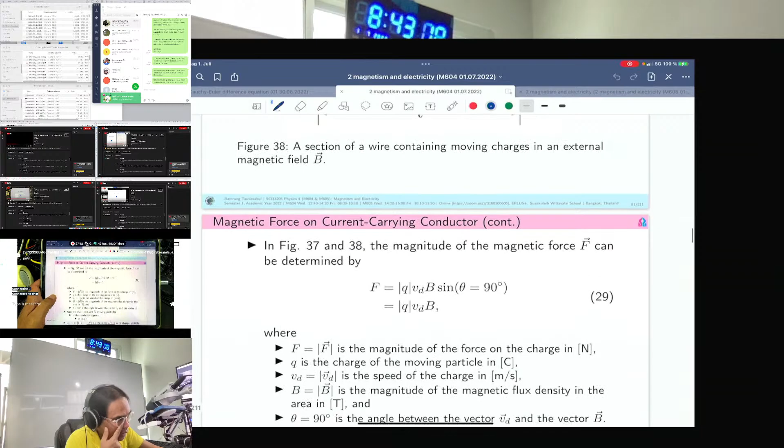We left at this formula. I should watch what's going on with you in Zoom too, right?

As you know, we have the formula, which is the product of Q, the charge, and the velocity of any particle, in the magnetic flux density. In this scenario, we have some particles like electrons or positive charges, and because those particles may not have the same velocity or speed, they use the average value, which is the drift velocity, denoted by V with subscript D. B is the magnetic flux density.

As usual, this is the absolute value of the charge, whether it's positive or negative. In this case, the copper wire, or the long straight copper wire, or the conductor, is arranged in a rectangular shape, normal to the direction of the magnetic flux density B.

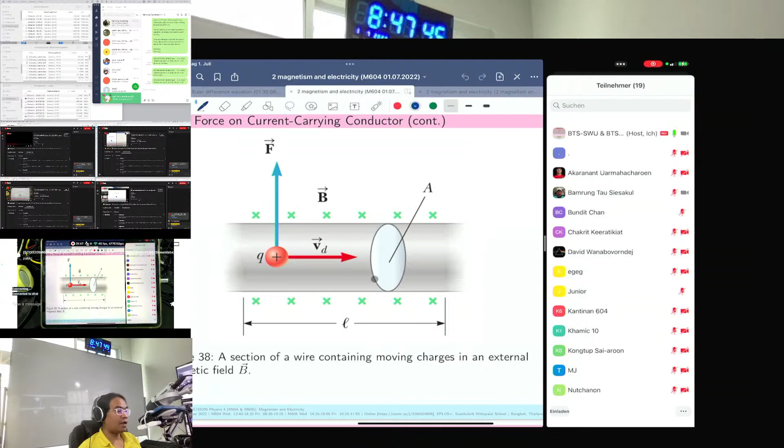We can see that the velocity could be computed by: let's say it starts from here at time 0, and when it reaches L, we assume it takes delta t seconds. So the velocity, the speed, will be the distance L divided by delta t, the time you have measured. So drift velocity will be L divided by delta t.

Okay, now let's consider the realistic situation. If you have the magnetic flux density like this, the vector is pointing. What does this mean then? The cross symbol means the magnetic field line is pointing into this paper, this plane, this lecture note. So the magnetic field is directed into this page, and this is the long straight copper wire.

Once we assume that we fix both ends of the conductor, and we have the conductor line or something to connect to the battery, the current can move in this direction.

Once there is no current moving, there's no charge moving through this conductor, there is no force at all. But once the charge moves through this conductor, the current is going in this way.

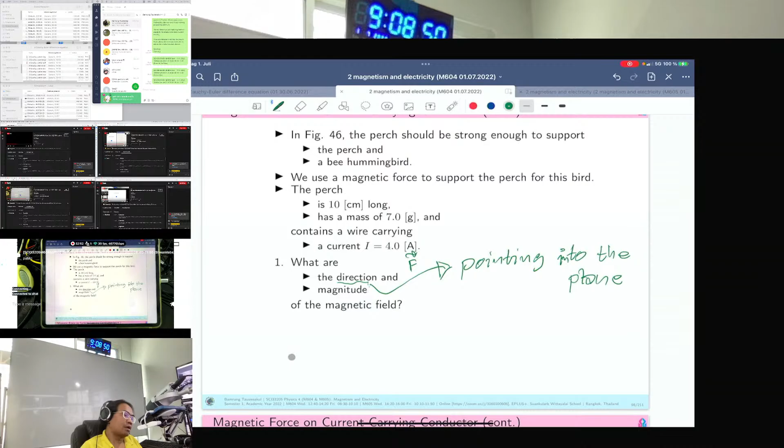That's the first one for the physics, but another detail is the magnitude. F is directed into the plane because we could get the force pointing upward. Regarding the magnetic field, they want to find what B is in this scenario.

In this scenario, you can see it's a right angle - here, right angle, 90 degrees. So theta is 90 degrees.

From the general expression, F equals I L B sine theta, our phi is 90 degrees, so I is 4 amperes and L is 10 centimeters which is 0.1 meter, and the magnetic flux B is what we want to know. Sine of 90 degrees will be number 1.

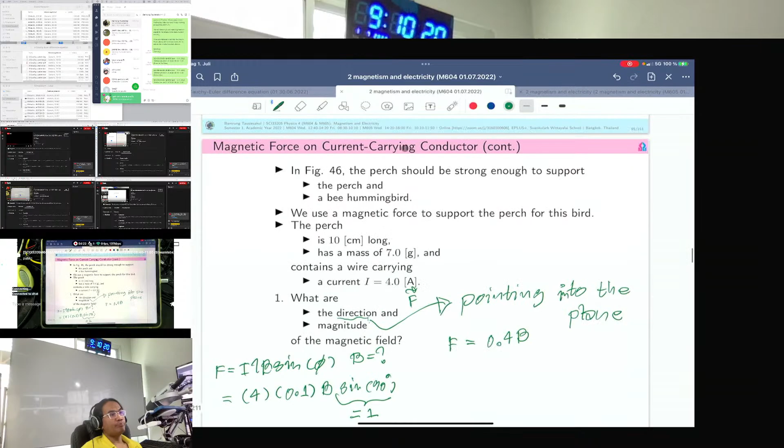So we're gonna get F equal to 0.4B, right? But F here from Newton's law, sigma F equals to 0 in equilibrium state. The force directed upward is positive, F magnetic upward, and the weight of the bird is pointing downward, so it's negative: mass of bird plus mass of the perch times g, equal to 0.

So it means F is equal to the mass of the bird, which is 1.6, plus the mass of the perch, which is 7 gram, but we need to convert it to SI system. Gram is 10 to negative 3, and g is 9.8. So that's F.

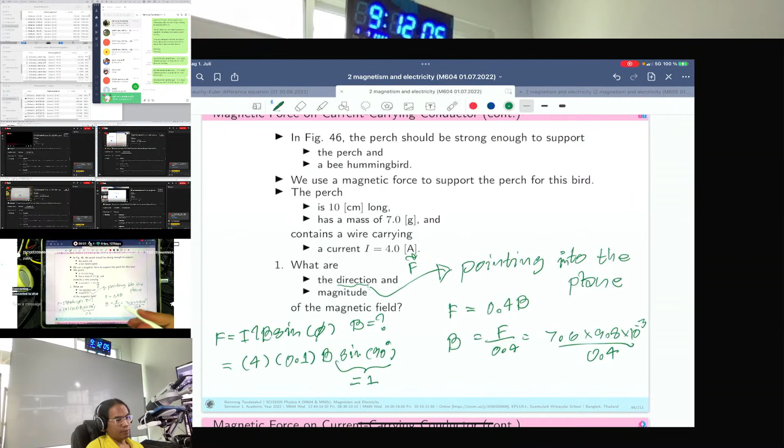We would get the value of B by F divided by 0.4, but F is what we have here, which is 7.6 times 9.8 times 10 to negative 3, divided by 0.4. You can put this value into the calculator.

0.1862 Tesla, the unit for the magnetic flux density. All right, and that's it for this problem.

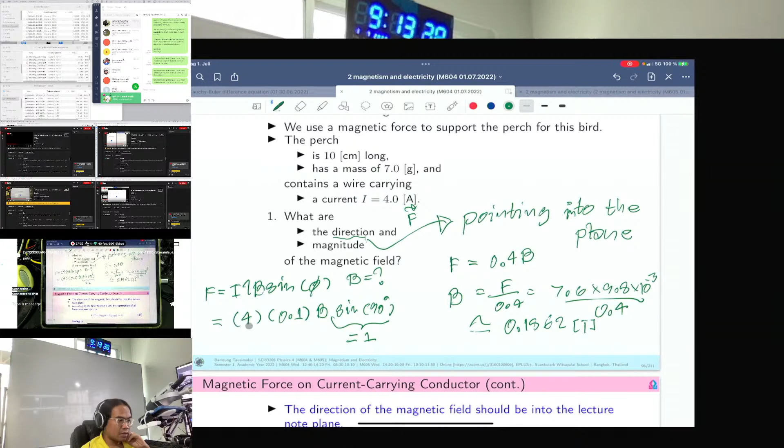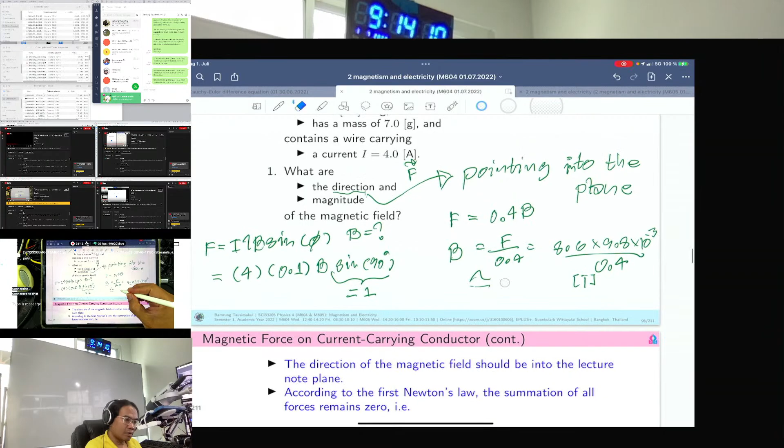1862... 4 ampere, right? 10 centimeter, 0.1, 1.6 — here 1.6 is actually 8.6, not 7.6. My God, I'm stupid. Okay, 2107. And that's the same value, right here, 2107.

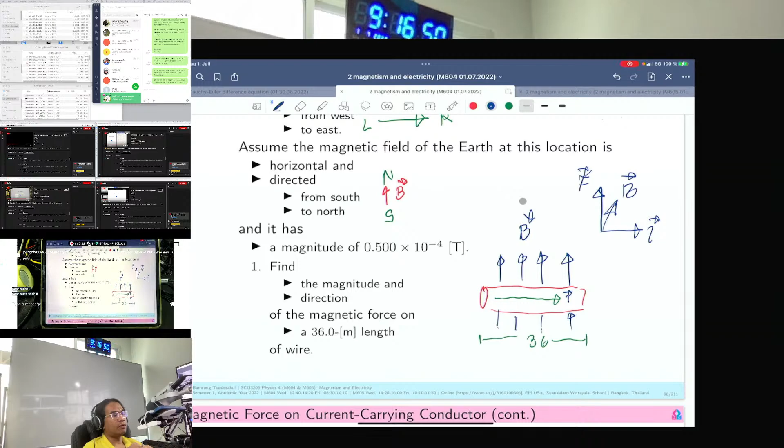The next one is the magnitude of the force. So F is I L B sine phi, when phi is 90 degree. I is the current, which is 22 ampere, times 36 meter, and B, which is 0.5 times 10 to negative 4. So you would have 11 and 36 is going to be 396 times 10 to negative 4. So it means 0.0396 Newton — it's not much. Is that correct?

0.0396, yes correct. The next one is: calculate the gravitational force on the same length of wire if it is made of copper, and the density of the copper is 8.92 times 10 to 3, heavier than water, and the cross-sectional area is 2.5. This is the gravitational force, this is weight, or W.

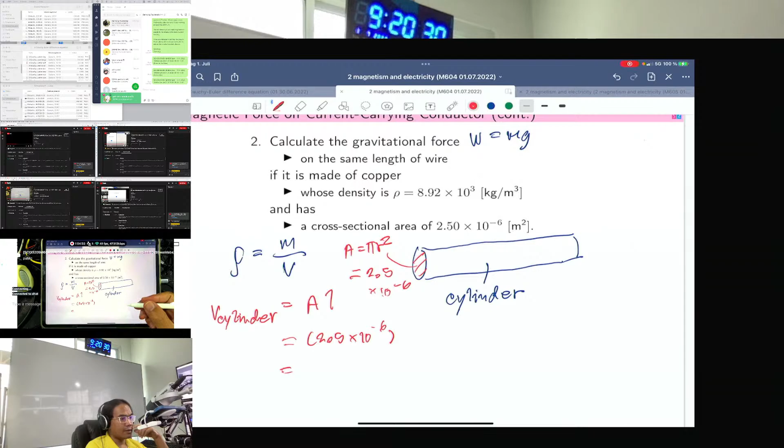Right, A is now 2.5, and L, the length of this copper, is provided here: 36 meter. That's 36.

And yeah, let's get back to this one. Mass will be the product of density and the volume. We get already volume here. We know the density of the copper right here, and we need to compute the weight, right? So W will be, in terms of density and volume, rho V g, right?

Rho is... no, 8.92 times 10 to 3, and V, volume, is 9 times 10 to negative 5, and the gravitational acceleration on that is 9.8.

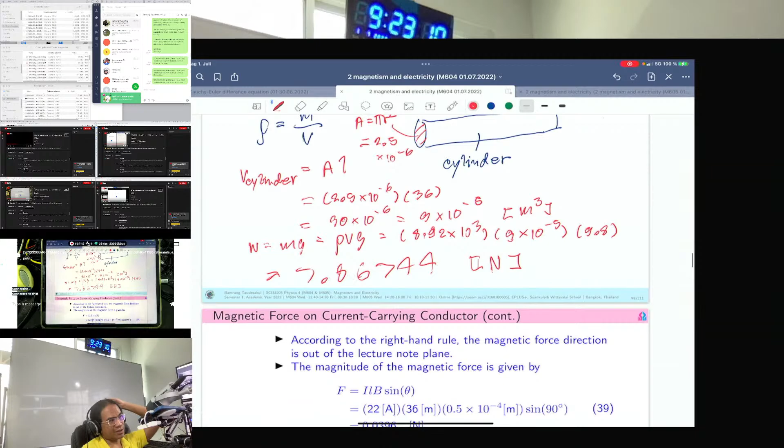It's nothing to do with magnetic force, actually it's about the density of any matter. 7.86744. Okay, now we arrive at the magnetic force between two conductors.

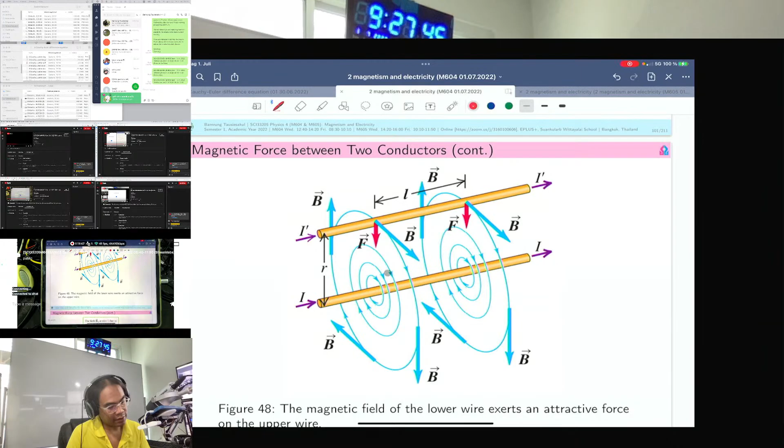And of course, the same way, this conductor will also generate the induced magnetic field. The magnetic field will pass through this one too, and from L to B you're gonna get induced force pointing upward. So in conclusion, when the current flows in the same way for both conductors, the force on each conductor will be an attractive force, the force that tries to keep them closer together, to move to each other.

But yeah, it's the same way from this book: if you have the distance d from conductor number 2 to number 1, and this is the length, we have distance d here, the current flows in the same way, and from the right hand rule, the magnetic flux density will hit this point and go out of this, and from L to B we cross the vector from L to B, we get the induced force pointing downward.

And in the same way, because this current flows inside this conductor, it will generate the induced magnetic field, and the magnetic field, according to the right hand rule, will hit this one and point in this way, so from L to B, crossing vector L to vector B, you get the force pointing outward. So this is the attractive force again.

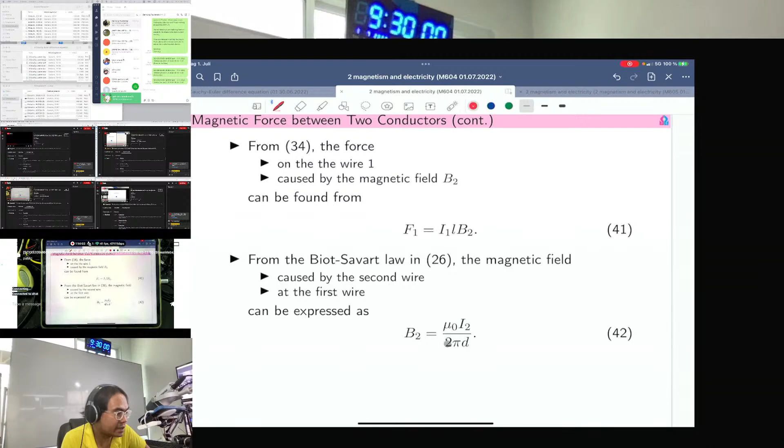If you substitute this onto this expression, I1 L times mu0 I2 by 2 pi D, you're going to get this expression: mu0 I1 I2 L divided by 2 pi D.

And if you calculate it the same way for the force on the second conductor, you will get the same value of the force, mu0 I1 I2 L divided by 2 pi D. So the forces on both conductors will have the same magnitude.

And if the current flows in the same way, you get the attractive force. If the current flows in the opposite way, you get the repulsive force - they try to go away from each other, but this one will try to attract them to stay closer together.

You can see that F1 is equal to F2. If the current flows in the same direction, you get attractive force. But if the current flows in the opposite direction, the parallel conductors will repel each other, giving a repulsive force. This is taken from the bachelor degree book.

If you have a single conductor, you will get an induced magnetic field like this according to the right hand rule, pointing like this. If you have current flowing in the same way in both conductors, the magnetic field lines will combine with each other, making a superposition, and you will get an attractive force. The force will try to keep these two conductors closer together.

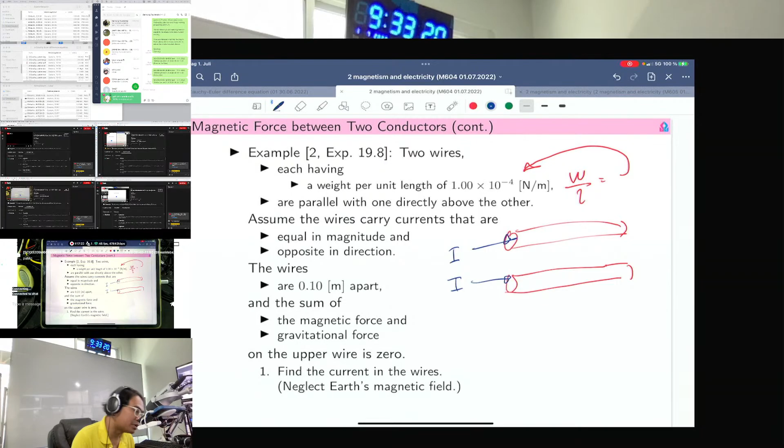If we have current flowing in the same magnitude, let's say it's I, but in the opposite direction - if the current flows to the left for the lower one - the wires are 0.1 meter apart. This is distance D.

The sum of the magnetic force and the gravitational force on the upper wire is zero. There will be an induced force pointing upward, and there will also be the weight of the upper conductor. We need to find the current, I.

Neglect the Earth's magnetic field - we don't pay attention to that. According to the formula, F equals mu-0 times I1 times I2 times L, divided by 2 pi times d. Because the current flows in opposite directions, this will be a repelling force - the force will be upward like this.

And for this one, the force will be downward. According to Newton's law, sum of F remains zero, so F equals W, and W is mg. But we don't know that yet - let's consider the left hand side.

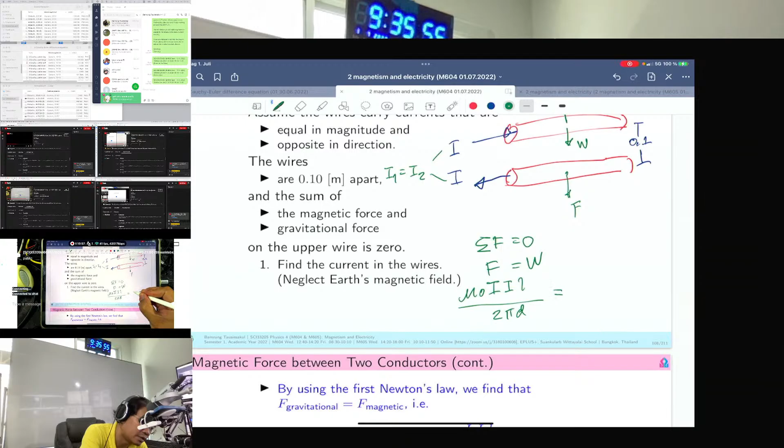And this equals W. But what they want to know is the current. Since this is I squared, we get I squared equals W per L, times 2 pi d, divided by mu-0.

Let's compute it. I squared: W per L is given as 10 to the negative 4. And 2 is 2, pi is pi, d is the distance, 0.1. In the lower part is mu-0, the constant - the permeability in vacuum is 4 pi times 10 to the negative 7.

You can cancel this and the 2 right here. Now you get 10 to negative 5 times 10 to 7 divided by 2, which is 100 divided by 2, or actually 50. But that's I squared, not I. So I equals the square root of 50, which is 5 times the square root of 2, or 5 times 1.414, which is 7.07 Ampere.

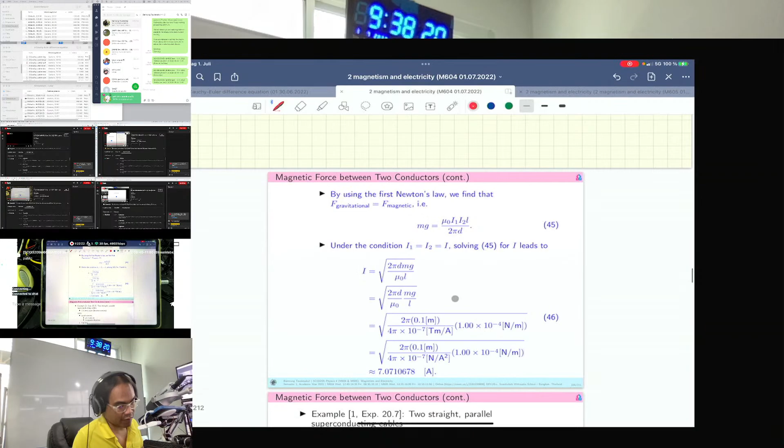Let's consider the next example: two straight, parallel superconducting cables. Superconductor means R is 0 - the resistance of that conductor is zero. The superconducting cables are 4.5 millimeters apart, so D is 4.5, carrying equal currents of very large magnitude, 15,000 amperes, in the opposite direction. Find the magnitude and direction of the force per unit length exerted on one conductor by the other - we should be concerned about the mechanical strength of this wire.

Let's consider the first question first: magnitude and direction. Let's draw something - a superconductor like this. The current flows in opposite directions, left to right and right to left, and I is 15,000 amperes, with D equal to 4.5.

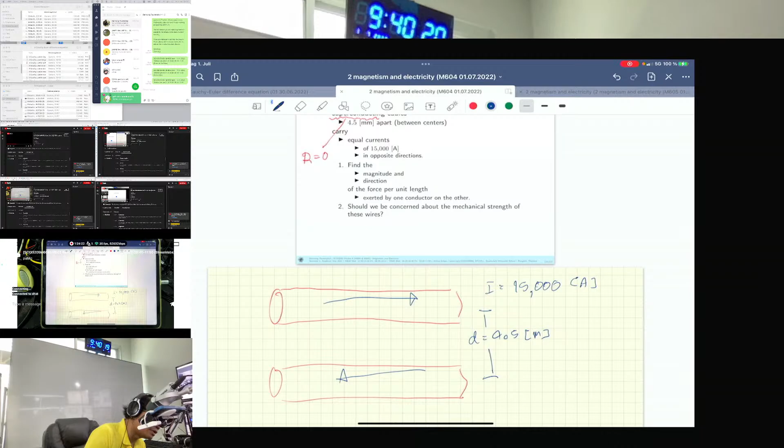Okay, direction, but of course, once you have the current flowing in the opposite direction, it means the force will be repulsive. It's gonna move this one out of the pair, and the force is gonna move this one out of the pair too.

That's the direction, and for magnitude, F could be computed from mu0 because I will be the same, right? This one is also I, right? Mu0 I1 I, but I2 is also I times L, divided by

2 pi d, right? But what they want to know is force per unit length. What is that? Force per unit length. So we can get F by L, the expression will be mu0 I square divided by 2 pi d, right?

So let's start to substitute. Mu0 is 4 pi times 10 to negative 7, I square. I is 15,000, 15 times 10 to 3 squared, divided by 2 pi, and d is the distance, it's only 4.5,

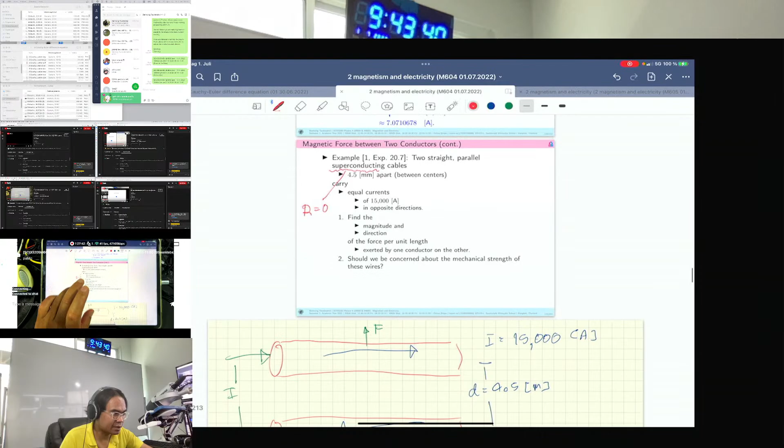Oh, 1000. 4 pi 10 to negative 7, 15,000, yes, 2 pi d. Millimeter, my god, I'm stupid. This is 4.5 millimeter, I'm stupid.

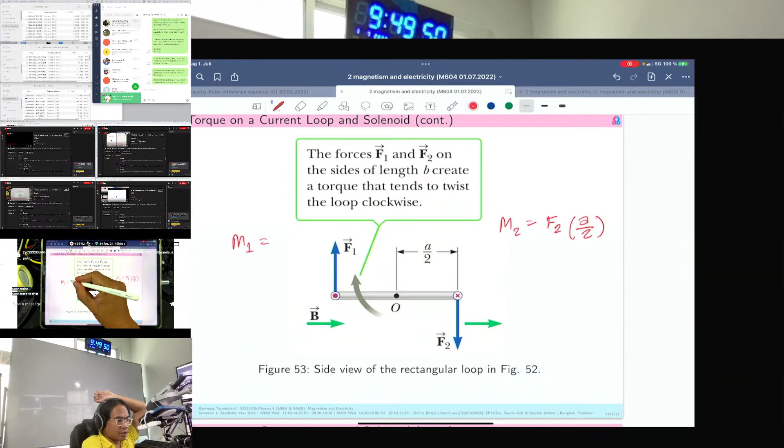So this one will be the moment here. Moment on the right hand side will be F2 times A divided by 2. Moment on the left hand side will be moment number 1, which is force number 1 times the distance, because the whole length here is A. You have divided it into 2 parts, each with A by 2, so it's A by 2 also on the left. The moment on the left hand side will be similar to the moment on the right hand side.

And if it's rotated a little bit by angle theta, this is the normal vector, the vector that is perpendicular to the plane of the conductor. If the normal vector is at angle theta to magnetic flux vector B, F will be different, because the normal vector is not 90 degrees, it's at angle theta.

So in this one, we're gonna use F2 as ILB sine theta, or sine phi. This F will be also ILB sine theta. Once you combine the torque on both sides, the torque will be the summation of this, which is F1, F2 times A by 2.

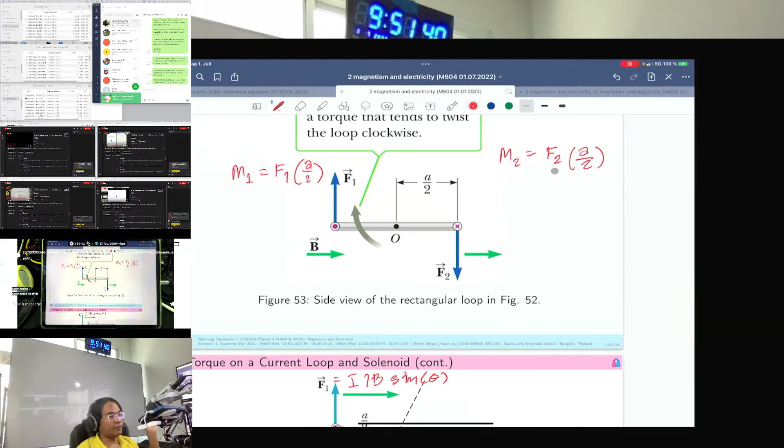But if F1 and F2 are the same, we just use this value and times the distance A by 2. Please note that the length here is B, small b.

So if you combine all these moments: F1 A by 2 plus F2 A by 2, because F1 is equal to F2, which is IbB sine theta. We substitute F1, F2 into this expression. We're going to get M equal to F times A, and F is IbB sine theta.

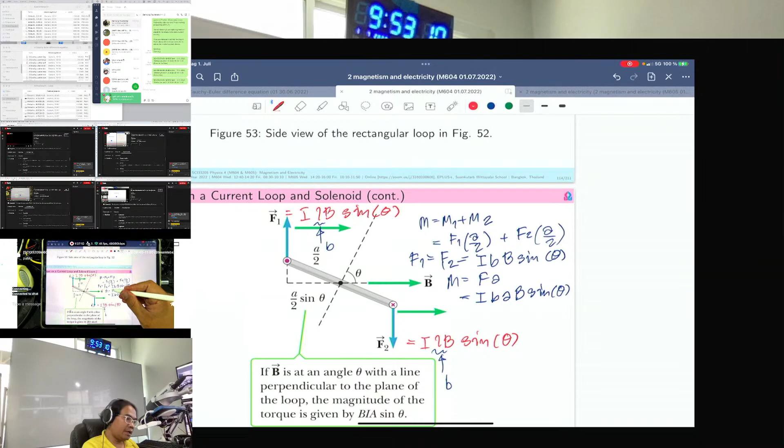And BA is what? BA is the area actually. If you multiply B and A, it's the area of this square. Area is B times A, so you get area for this one. So this one is IAB sine theta.

Once you combine the moments in terms of torque, you get something like this. Each one is IAB, and once you combine it's IAB sine theta. The way to memorize this formula, whatever technique you can use, the important thing is I times A is known as the magnetic moment of the loop, which is the characteristic of the conductor, the product between current and area.

It's denoted by the unit of ampere times square meter, because ampere is the unit of current, square meter is the unit of area. A is the product between A and B, that's the rectangle area of the conductor loop.

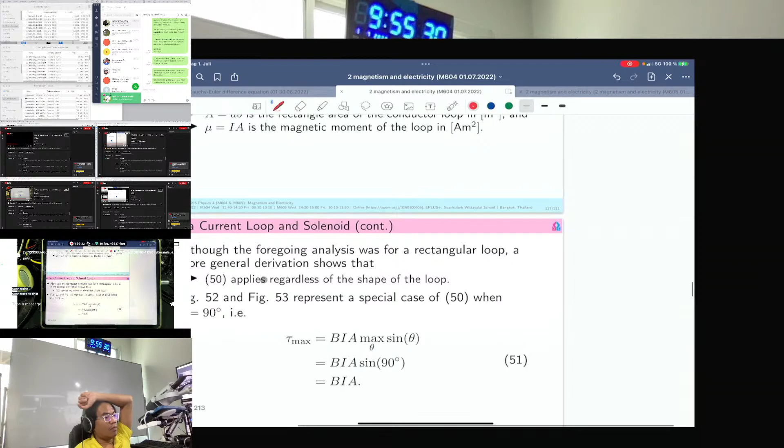Torque max, the maximum value, as you know the sine function is like this: it's zero at phi equal zero and maximum at theta equal to 90 degrees. So once 90 degrees is substituted, sine 90 is number one. So torque max is BIA: magnetic flux density, current, and the area of that conductor loop.

Now let's take a look at a more complicated figure.

In this one, we have the conductor loop like a rectangle. The length here is A, the length here is B. Magnetic flux is pointing upward, you can see the blue line here, magnetic flux density, magnetic field line pointing upward. And they use an alternative variable, phi, instead of theta.

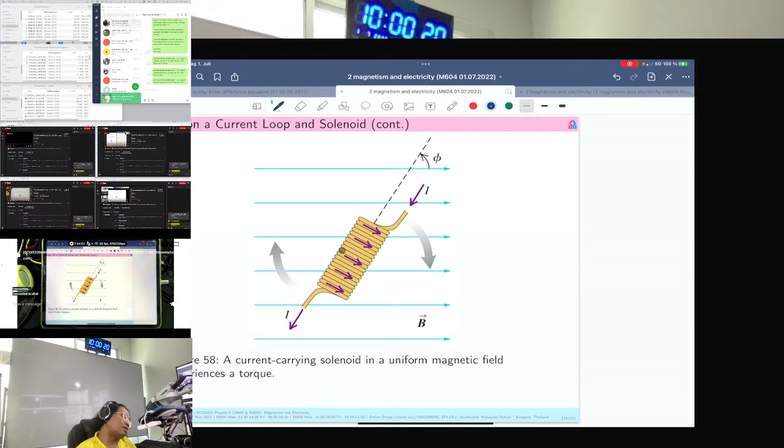If you have a large number of turns of the conductor, several rounds, number of turns being n, you get n times this torque, n will appear here. The formula now becomes BIAN, where the capital N is the number of turns. If it's a single loop, N equals 1. If there are many loops, it becomes N. Once we arrange it in a solenoid way with many loops, and the number of loops is capital N, the torque will be the superposition, they add to each other.

We get BIAN, or you can memorize it as I-bar or bar-in, whatever you want, but I'd prefer BIAN. BIAN sine phi, and mu n here is the magnetic moment, which is the behavior of the conductor. BIAN, without the B.

Now let's consider this example. We have a circular coil, with average radius 0.05 and 30 turns, lying in the horizontal plane. It carries a current of 5 amperes in a counterclockwise sense. So if you have a conductor like this, the current flows this way counterclockwise and returns to this one. This is the top view, when viewed from above. The coil is in a uniform magnetic field directed toward the right. So the magnetic field is directed this way, this is magnetic field B.

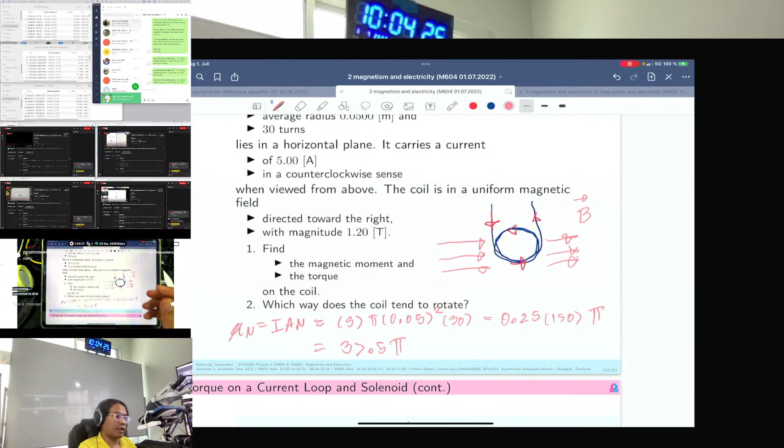It's 3... 7.5 pi. Okay, we can have it... time's up but let me finish this problem first. You can have the exact value from this one. 37.5 pi.

117.8, approximately 117.8. The unit is ampere square meter, right? And for the torque, we just have the torque is B times mu sine phi.

B mu sine phi. This one we have the normal pointing upward, and the phi is 90 degrees, right?

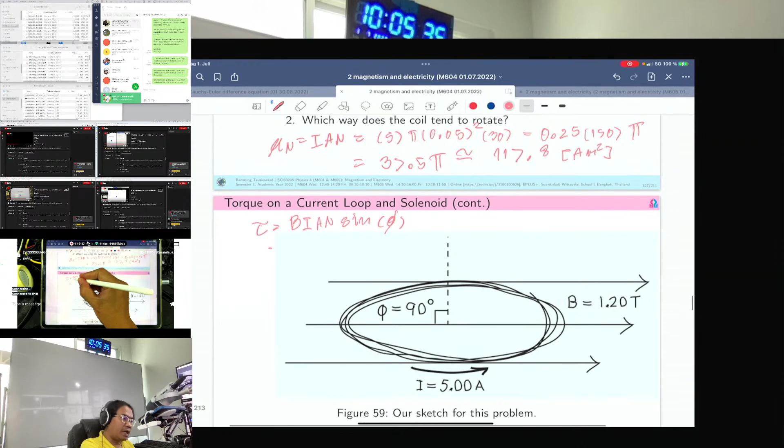So B is 1.2 times this thing, which is 37.5 pi, and here is sine of 90, which is actually number 1. Okay, you multiply 1.2 and 37.5 pi.

Let me add a page to make it easier. Times 1.2... 141.37 Newton meter, right? That's the moment, force, and distance.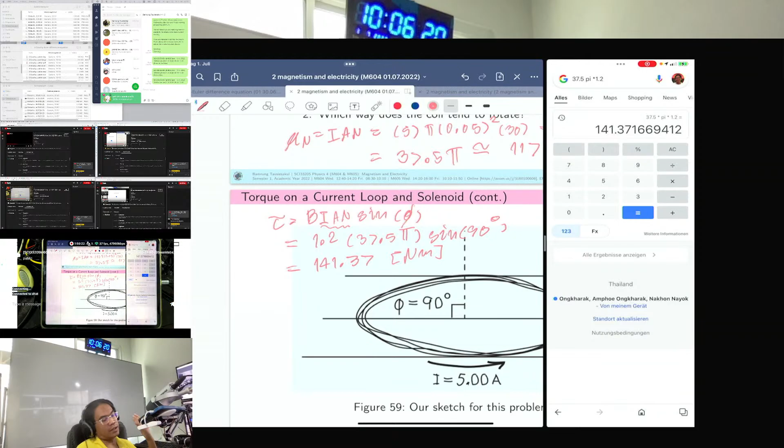Let's see whether it's correct or not. 0... oh, without N, okay, that's the one, and with N we're gonna have 1.17. Huh? 0. Oh, this one, my god, stupid. 0.0025, my god.

And that's the 0.375. Okay, and we're gonna get 1178. Okay. Yes, and this one is not 37, it's 0.37. Okay, we would get 1.41, approximately.

Newton meter. 1.41. The torque. So what? Here's the sketch of that problem. So how does it rotate then?

Vector L is like this, right? L. Vector B is like this. So the force is gonna be up. And on this side, the force is gonna be down. So if you look at the side view, it's gonna rotate in the counterclockwise direction. Okay, this connector will rotate. On the left side it will go down, on the right side it's going up, so it is counterclockwise direction.

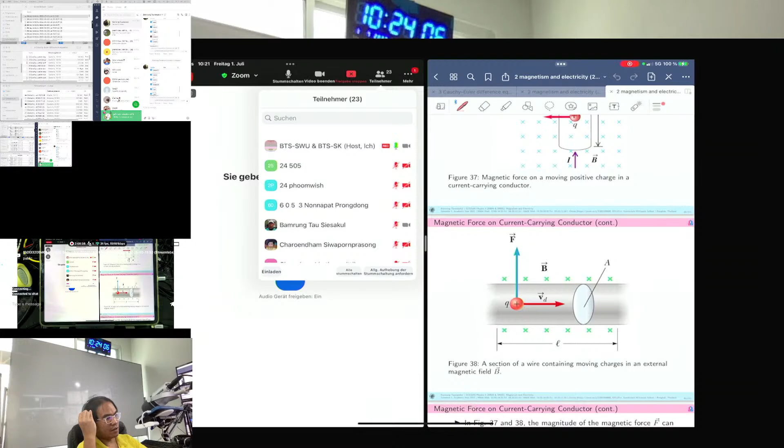ILB sine theta, right? We have already discussed something about it. Okay, we arrive at this figure, if I can remember properly. Yes, the drift velocity, right?

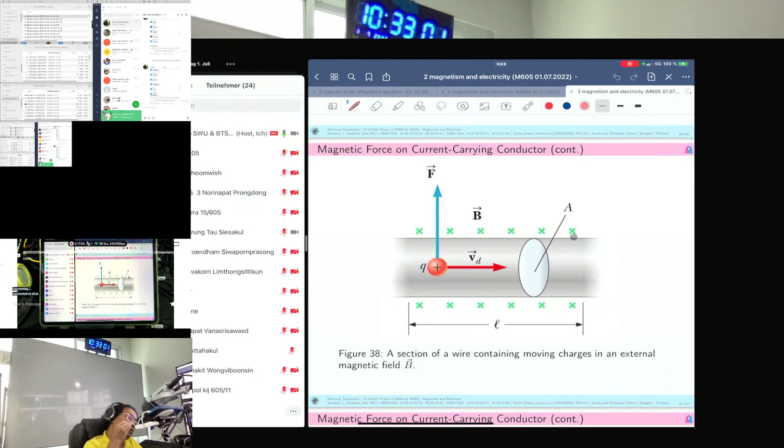If we have capital N particles at a constant speed Vd, all of them moving with the same average value Vd, we know from before that velocity or speed is distance per time. If we observe the movement of this charge from this point to this point, and it lasts delta t time, whether it's 1, 2, or 3 seconds, delta t is the observation time.

So the speed will be the distance, which is the length of the conductor that we want to observe, divided by the time that we spend to observe that movement.

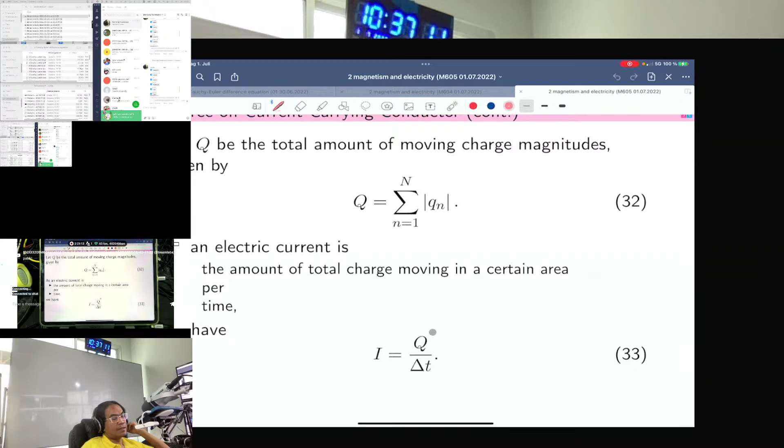And from the theory of current, right? Current is the charge movement per time, right? This is the basic ratio, and this is the basic summation that we need to keep in mind.

The next one is we consider the total continuous force in this area. If we have capital N particles, of course the force is going to be the summation of all N forces. Fn will be Qn Vd B, according to the previous formula, and this is the force caused by the N particle. But the summation depends only on N here. There is no N dependence on Vd and B.

The summation here is the big Q, the capital Q, and velocity here is L by delta T. L by delta T is distance by time, right? That's the drift velocity. And if we express the capital Q here, and if we move the denominator, Q by delta T, it's going to be current. Or you multiply delta T here, it's I delta T. So you cancel this one, it's going to be ILB.

This result, ILB, is valid when your conductor is situated at 90 degrees from the magnetic flux density, the magnetic flux vector. If it is oriented a little bit with angle theta like this, it's not situated at 90 degrees with respect to the magnetic field anymore.

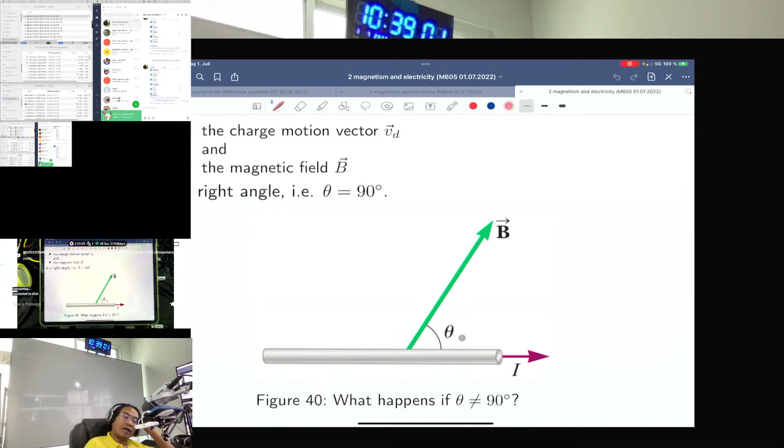If it lies at a certain angle theta, which is not 90 degrees, we have to project the magnetic field to the perpendicular component like this and the parallel one. The parallel one has no effect to the force at all, because if you cross your vector this way from vector L to this B, the angle is 0. There is nothing happening, right?

But this one is useful, because it's 90 degrees with respect to the velocity vector of the charged particle. So we project the original component, which is made at angle phi. So this one is going to be B sine phi. B cosine has no impact to us, has no effect to the force. Now we project the magnetic flux to the perpendicular component, which is B sine phi. The expression actually comes from the cross product, which is L cross B here.

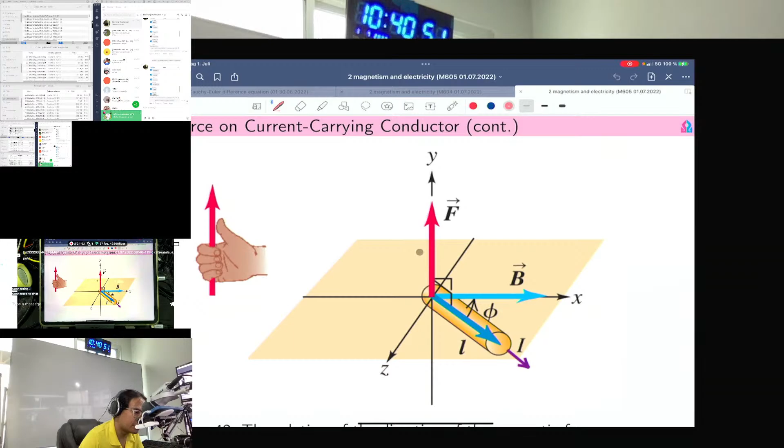F is I L cross B, it's not Q V cross B anymore. L is the vector along the length L of the conductor, the same direction as the current movement. So how can we determine L to B? This is vector L, this is vector B. You rotate your four fingers here. Your thumb direction will give you the induced force direction, pointing upward.

And in the next scenario, your vector L is like this. You cannot rotate to this one because the angle is greater than 180 degrees. You need to rotate in this way, when the angle is less than 180 degrees. And once you use your right hand, you rotate your four fingers like this. Your thumb direction will give you the induced force downward like this.

If they lay down the conductor, they flip the conductor to the opposite way. The current is flowing out of the original location. L to B like this, right? You cross your vector from L to B. Your thumb direction will give you the direction of the induced force pointing upward.

And what is the application of FILB, or what we are studying here? The application is a speaker, you can see the speaker, right? The electronic device that can increase your voice, increase the sound of your voice or music or so on. If this one is very big, you're gonna get very loud music or voice of somebody.

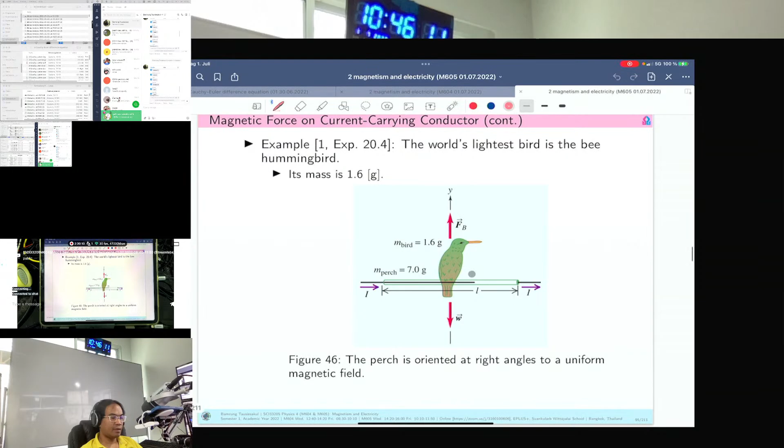We want to build up a long straight bar, known as a perch, that can support the hummingbird to stand up. When we say it can support, it means that all of these particles, of these two things, the bird and the conductor, will stay in equilibrium. So in equilibrium state, it means that the summation of F remains zero, according to Newton's law.

It means that the force that tries to lift the bird up, and the gravitational force caused by the bird and the perch acting downward, these two forces would be the same in magnitude, equal to each other. So the question is, what is that?

The perch is 10 centimeters long. It has a mass of 7 grams, and the current that flows through this conductor is 4 amperes. What are the direction and magnitude of the magnetic field? So we need to find what direction the magnetic field should point, and what is the value of the magnetic flux density, so that all this stuff will stay in equilibrium state, meaning the lifting force and the downward force would be the same.

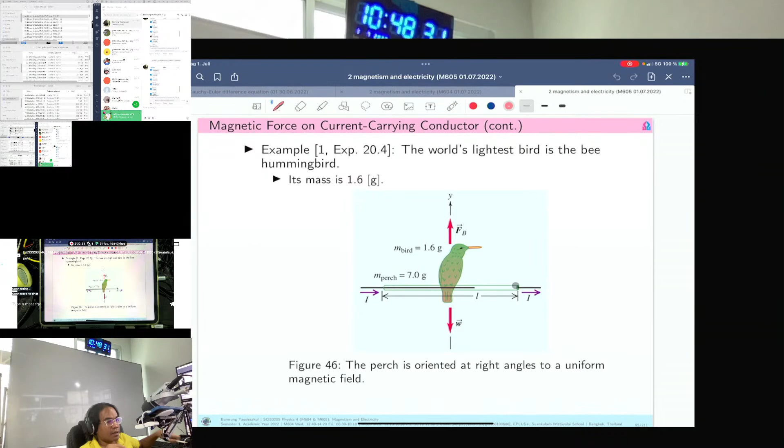In order to determine the direction, let's see. The current flowing this way is vector L. In order to get the lifting force, we need the direction of the magnetic flux density, so L to B. Vector B should be in this way, so that we can get the lifting force like this. This is the three-dimensional drawing of this one. L to B, we get the direction pointing upward, and that corresponds to vector F here. So the magnetic field should...

Okay, this is the answer for the direction. The magnetic flux should be pointed, or directed, into this plane. And what about the magnitude? What is B then?

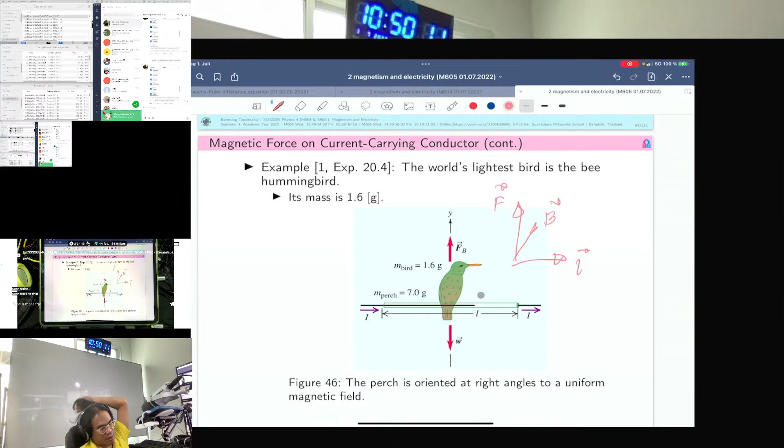Okay, you know that an object has the lifting force and weight W, right? From Newton's law, if sigma F equals 0, we get F equal to W. But F from the magnetic force is F = I L B, and if the magnetic field is directed into this space, the angle is 90 degrees, so we get sine of 90 degrees, which is 1.

Let's substitute I and L B. I is 4, L is 0.1, B is the magnetic flux density they want to find. So it's 0.4 B.

From Newton's law we have mass times g, right? But this mass should be the mass caused by the bird and the perch. So F will be the mass of the bird plus the mass of the perch, times g, which is 9.8.

Let's substitute that. Mass of the bird is 1.6 gram, plus the mass of the perch is 7 gram, but we need to convert it to the SI system, kilogram, so it's times 10 to negative 3, and g is 9.8. Here we have 8.6 times 9.8 times 10 to negative 3.

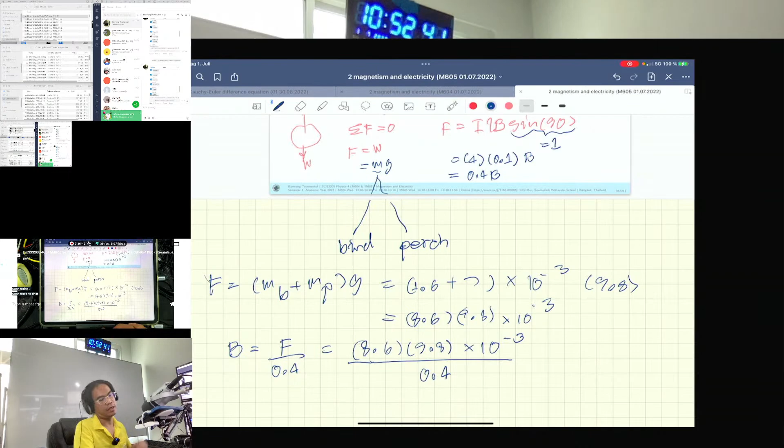According to this relation, B will be F divided by 0.4. So F is this amount: 8.6 and 9.8 times 10 to negative 3, divided by 0.4. Okay, let's compute this.

8.6 times 9.8 e minus 3 divided by 0.4, and we get 0.2107. So it's equal to 0.2107 Tesla. Is that correct?

Yeah, it's correct. Okay, let's move to the next example.

A wire carries a current of 22 amperes from west to east. West to east means left to right. Assume the magnetic field at this location caused by the Earth is horizontal and directed from south to north. So this is vector L, and here is vector B from south to north, with magnitude 0.5 times 10 to negative 4.

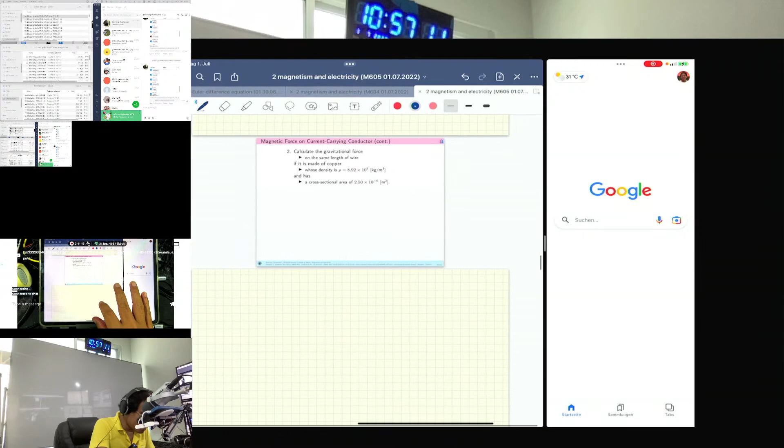So the gravitational force, which is W, mg. Of course g we know is 9.8 meter per second squared. And the mass of the conductor is... oh, I don't know.

Rho is m by v, the mass divided by the volume. If you want to find the mass, it will be the product between rho density and the volume. So we get rho times v times g. But v, the volume of this one, will be the product of cross-sectional area times the length.

So simply speaking, rho times volume will be A times L, because you have the length here as L. So we substitute A L into this expression, and it becomes rho A L g.

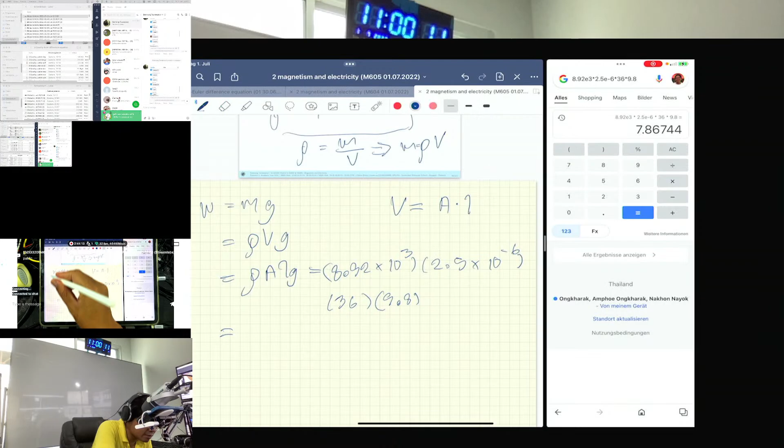7.86744. That's Newton. Okay, 7.867. Okay, like this. It's correct.

So those are two examples about the induced magnetic force on the long straight current-carrying wire. But now we will consider magnetic force due to two conductors like this.

We have the long straight current-carrying wire lying here, and you have another conductor which is not far from each other. They are separated by the distance r here. Both will have current flowing, okay, maybe they are not in the same amount, I prime and I.

With this one, according to Ampere's law or the Biot-Savart law, according to the right-hand rule, there will be an induced magnetic field rotating like this. At this point, the magnetic flux will go in this way. Once you have the vector L, the current moving in this way, you rotate your four fingers from vector L to vector B, you're going to get the force that is pointing down.

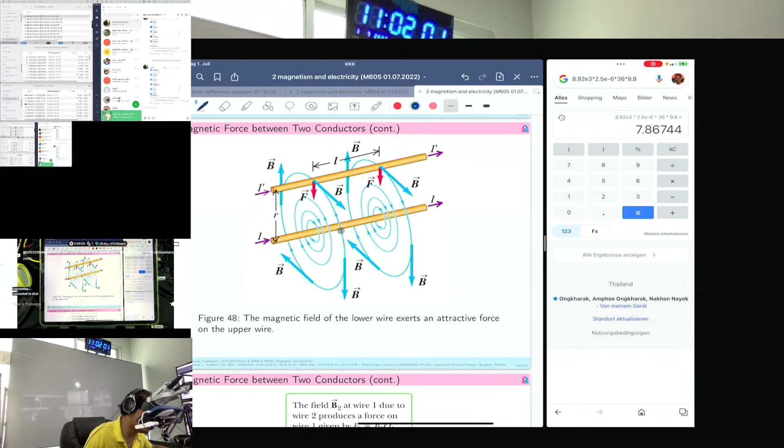In the same way, this one, the current is flowing this way, and this one will generate the induced magnetic force, and it hits this one pointing this direction. If you rotate from vector L to vector B, you're going to get also the force induced in this way. Okay, from another figure taken from another book.

When the two conductors are arranged in the same way in parallel configuration, the induced magnetic field is going to point out of this. This is the induced magnetic field caused by the second conductor, L2 or I2 here. If the currents are not in the same amount, I1, I2 may be different from each other, but the induced magnetic field will point in this way.

If we rotate our four fingers from vector L in this direction to vector B, which is 90 degrees from each other, you're going to get the force that is directed into the other conductor.

The force here could be computed from F1 equals I1 L B2. Because this is the induced magnetic field from the second conductor, it's denoted B with subscript 2. But I1 is the current that flows in the first conductor, denoted by subscript 1. The force number 1, the force induced on the first conductor, is I1 L B2, clear, B2, because it's the magnetic field from the second conductor.

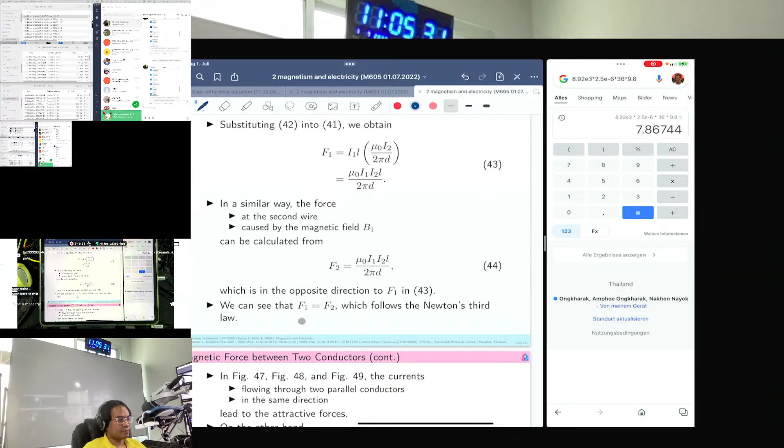Figures 47, 48, 49 will give you some more idea, but figure 50 will summarize everything. If you have only a single conductor right here, there will be no force, but there will be induced magnetic field, because you let the current flow in this way.

If you have two conductors laying in parallel like this, and you let the current flow in the same direction, you will get the attractive force, the force that tries to bring these two conductors together. And if you let the current flow in the opposite direction with the same magnitude, this one going up, this one going down, the force will change from attractive to repulsive force, the force that tries to keep the second conductor away from the first conductor.

All right, now let's consider the first example about two wires: magnetic force on two conductors.

If you have two wires and each conductor has a weight per unit length, they didn't provide the weight directly. They only provide weight per unit length, 1 times 10 to the negative 4 Newton per meter. These are parallel, one directly above the other.

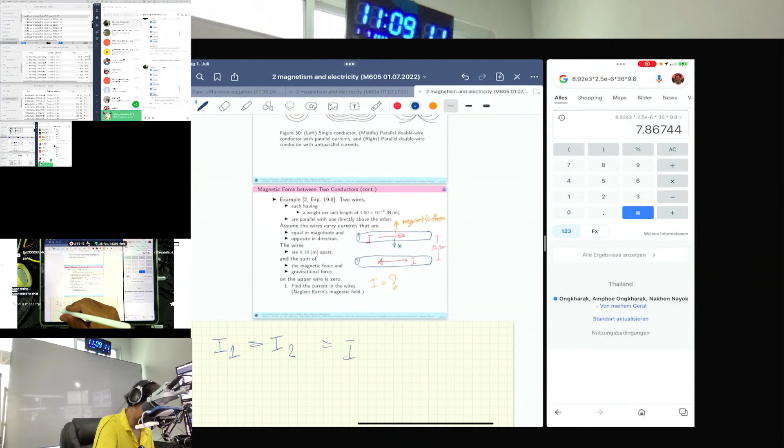F1 will be mu 0 I1 I2 L divided by 2 pi d. And I1 is equal to I2, which is I, right? So we're going to get mu 0 I squared L divided by 2 pi d. But what we want to find is I, right? So we move 2 pi d to the left, mu 0 to the left, L to the left. So we're going to get I squared equals 2 pi d F divided by mu 0.

But F could be computed from the equilibrium state, right? Summation of F is 0. Newton's law says summation of F is 0 in the equilibrium state. It means the magnetic force will equal W, the weight, which is mg, the mass of the conductor times gravitational acceleration on Earth. The mass of this conductor, how could you find that?

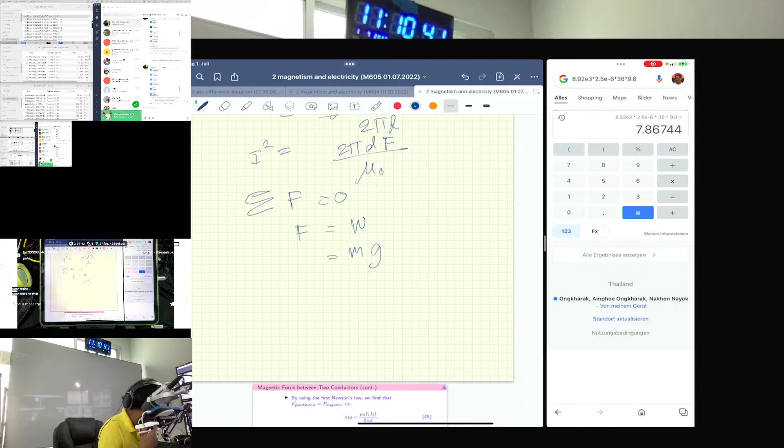What they say is... don't worry about it. We would not go into detail with mg because they don't provide that. What they provide is only W per L.

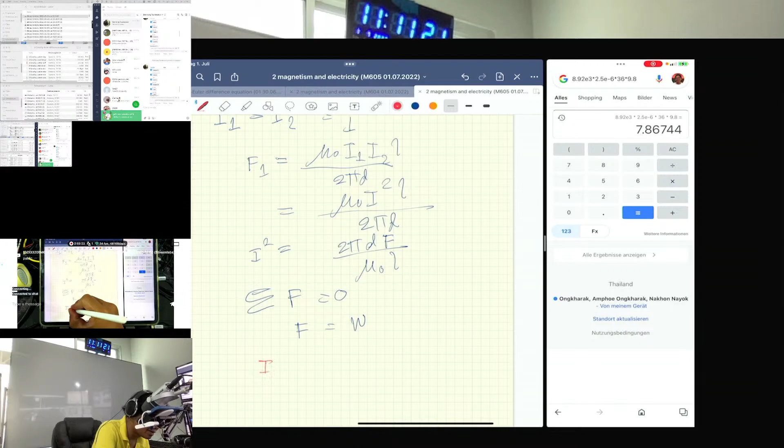Because F is W, so I squared will be 2 pi d W divided by mu 0 and L, okay, like this.

And they have provided the value for W per L, weight per length, right? 2 pi is 2 pi. D is the separation distance, which is 0.1 meter. W per L is 10 to the negative 4, like this.

Okay, let's use the calculator. 10 to the negative 4 divided by the constant, right? Magnetic permeability in vacuum, 4 pi times 10 to the negative 7. You can cancel number 2 here, right? It's going to be 0.05 times 10 to the negative 4.

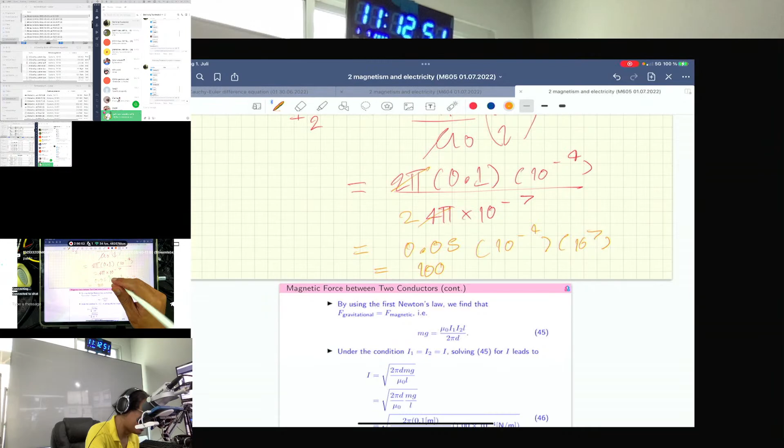And 10 to the negative 7. So finally, it's going to be... 1,000, so it's 100. But this is not I, it's I squared, right? If you take the square root, I is going to be the square root of 100, so it's going to be 10 ampere.

I'm not sure whether it's correct or not. Oh no, 4 pi, 2 pi... 1,000... Oh, it's only 10. My God, stupid. Oh, 5, my God. 1,050... square root of 50. Right, square root of 50.

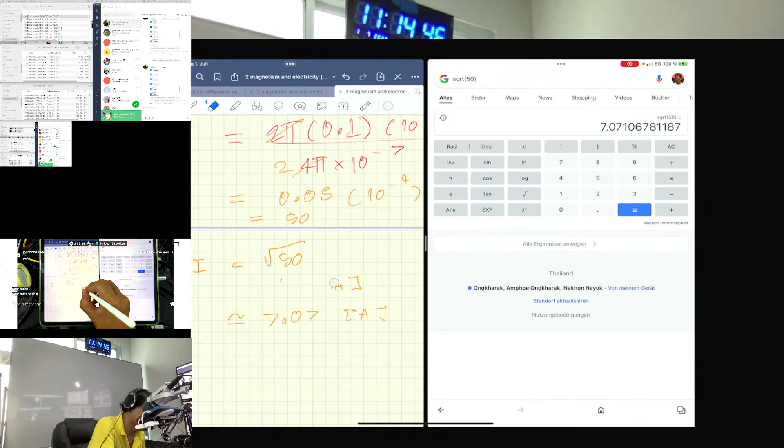7.07, is that correct? Yes, okay, square root of 50, and that's 7.07, approximately ampere. It's not this one.

7.07 ampere, for the first example about force on two parallel conductors. Okay, let's consider the next example.

4.5 millimeters apart, okay, between centers. Carry equal currents of 15,000 in opposite directions. Find the magnitude and direction of force per unit length that one conductor exerts on another. So let's draw. If you have the first conductor like this, you have another conductor like this.

The current flows in the opposite direction. 15,000 ampere. 15,000 ampere. And the distance is only 4.5 millimeters.

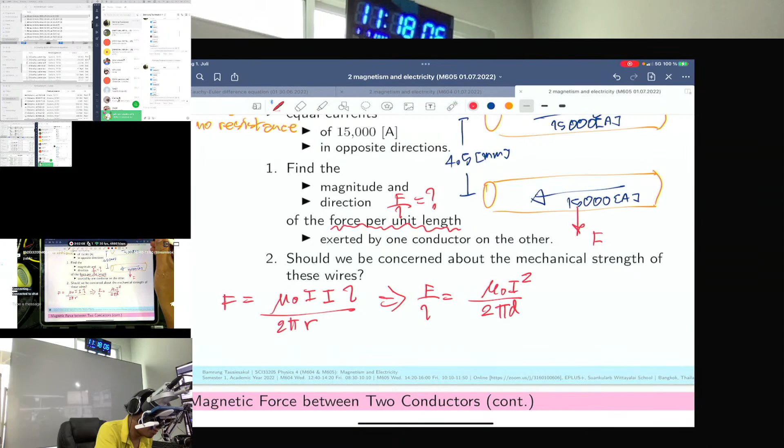So F per L will be mu0, which is 4 pi times 10 to the negative 7, and I squared is 15,000 squared, divided by 2 pi. Distance is 4.5 millimeter, which is 4.5 times 10 to the negative 3.

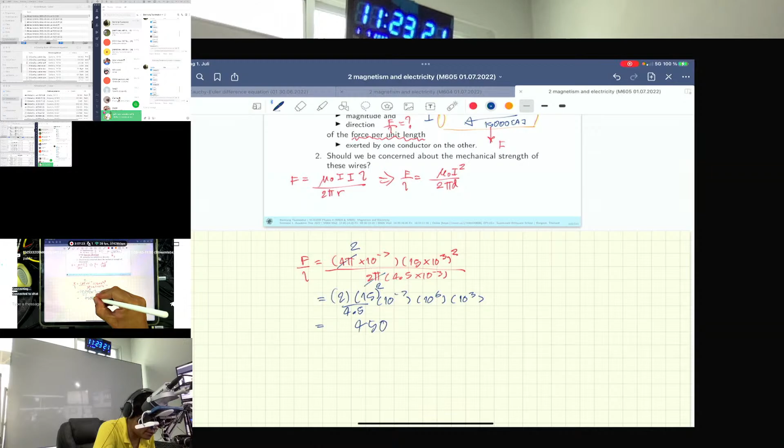Oh, I forgot - 15,000 squared gives 2 times 15 squared, which is 450. 450 divided by 4.5, times 10 squared, so it's going to be 100 times 10 squared, which is 1,000, 10,000, 10 to the 4 Newton per meter.

So let's consider this in reality. Should we be concerned about the mechanical strength of these wires?

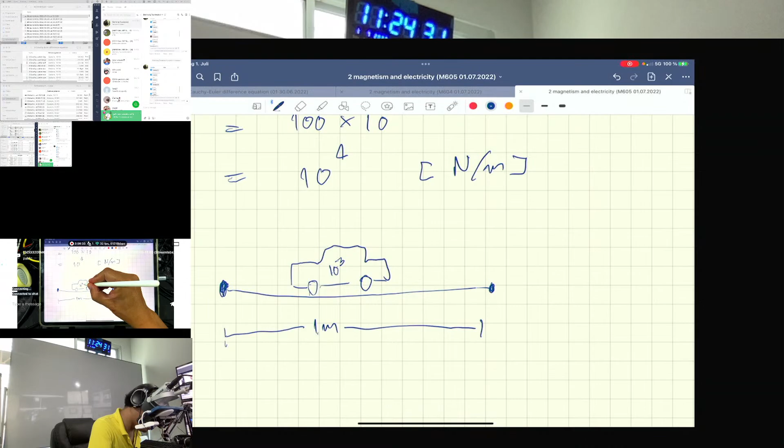What is that then? It means in 1 meter, if this is fixed and this is the line, there will be a weight like a car, okay, in 1 meter - like a car that has its own weight around 1 ton, 10 to the 3 kilogram. In 1 meter, is it possible?

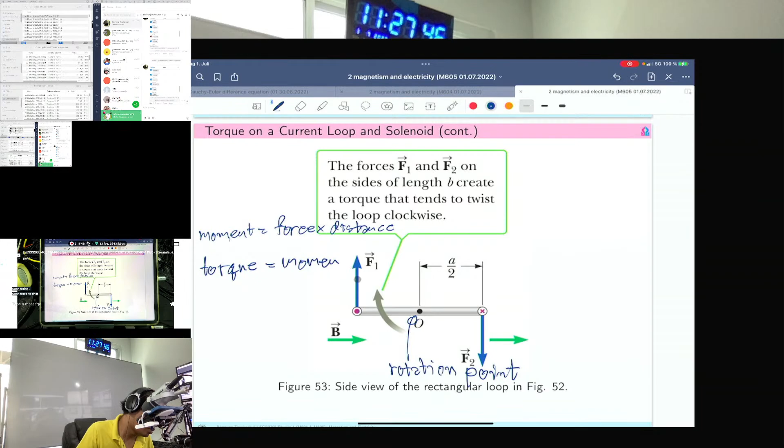And the moment is force times distance, and torque is another word for moment. In this one, if this is the pivot rotation point, this is the rotating point - moment from the left one, which tries to keep it moving around, and this one moves it in the same way.

Moment will be moment 1 plus moment 2. Moment 1 is F1 times the left hand side distance, which is F1 times A by 2, plus F2 times A by 2. But F1 is equal to F2 in magnitude, so let's call it F. So the magnetic moment will be F times A, where A is the distance in this part.

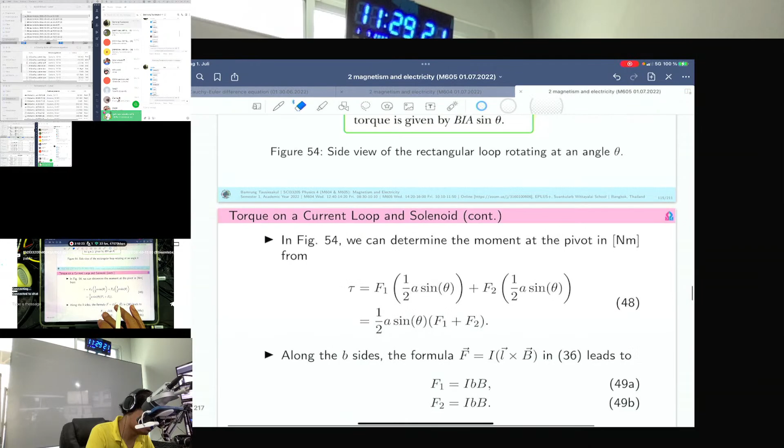F could be computed from ILB, right? F2 is IL, the length of the conductor, times B, small b, IBB. F1 here on the left hand side, again the same, IB. Okay, F is IbB, it's the same thing.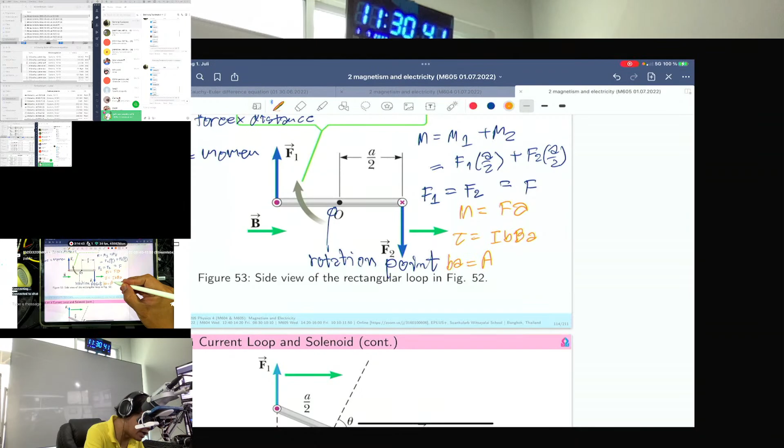F1, F2 is F, so M, which is the torque actually, is IBB times A. But as you know, B and A is the area, right? The area right here, B times A is the area. Let's say it's the capital A. So this one, the torque will be IAB.

What do you want to say? BIA. Okay, or you want to say IBA, like this. Whatever sequence of these 3 variables. Okay, just memorize this thing for torque.

But what happens if we arrange this conductor at the angle theta? Okay, the normal vector of this, this is a side view of this one. Normal vector of this area is directed like this, situated at angle theta from the vector B, like this.

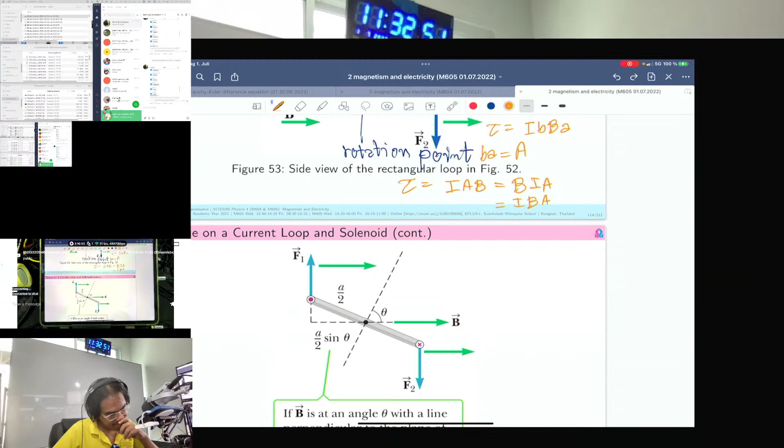So you can see that we can project this one to the normal component. We can project this vector to this component. The distance here is going to be 'a' side, it's not 'a' anymore, okay.

This angle phi, right? This angle phi, so this angle will be also theta, right? And if we draw it again, this one is a by 2. This is theta, right? A by 2 sine theta, right? Okay, the distance here is a by 2 sine theta. So instead of a by 2, we're going to use a by 2 sine theta.

So everything will start from here. IBBA sine theta. Right, torque is IBBA sine theta. And yes, torque will become BIA sine theta finally, because B and A is the cross-sectional area, is the area. All right, BIA sine theta.

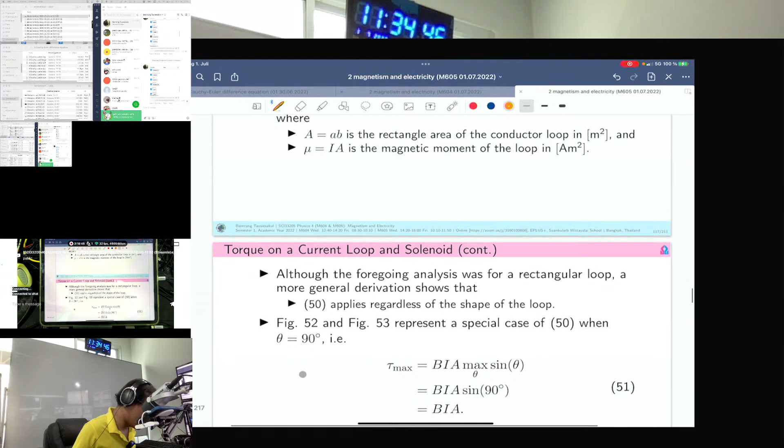And the maximum value, if you take the maximum value of sine theta, as you know, sine would have a shape like this. We start from 0, right? This is sine theta, and this axis is theta. Okay, the maximum value, you start here at 0. The maximum value is this one, which is theta is 90 degrees. Okay, theta is 90 degrees, the maximum value, which is number 1.

Maximum value of sine theta is number 1, so we max this one. It's going to be sine 90 degrees, number 1. This is equal to 1. So the resulting torque max, okay, it's not typical torque, it's torque max. The maximum value of the torque is BIA, okay, without sine theta, because the maximum value of sine theta is number 1.

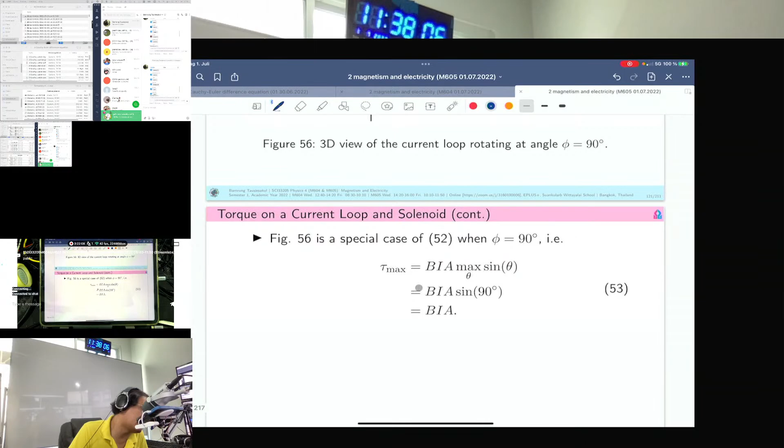The normal vector is situated at 90 degrees to the vector of the magnetic field. This is the maximum torque moment. Torque max will be BIA sine 90, BIA.

The torque will not exist if the conductor is located like this, because L is this way. L cross B, the force will point this direction. L in this way, L cross B, the force will be in this direction. They will cancel each other because it lies in the same plane.

This L is in this direction, cross B, you get the force in this direction. L cross B, you get the force in this way. This will cancel with this force. This is the moment we have minimal force, zero force actually. The torque min is 0.

If you have many rounds of conductor, like a spring and so on, the torque will be n times the original one, n times more, you just add it. The formula becomes BIAN sine phi, or BIAN sine theta. The important thing is known here as the total magnetic moment, which includes all terms: I, A, and n. So mu n is the total magnetic moment.

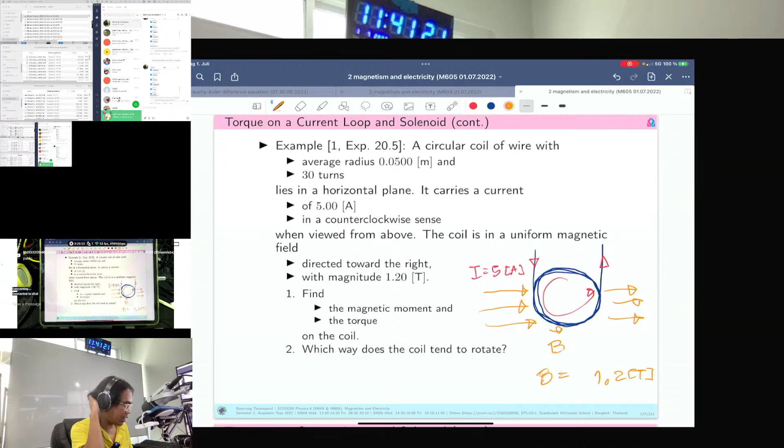Your L vector is going to be here, and this is the vector B. L cross B, it's going to push this one down. L cross B, it's going to push this one down. L, it's going to lift this one up. Lift this one up, push this one down. Yeah, it's going to rotate like this.

Find the magnetic moment and the torque on the coil. We are running out of time right now, let me complete this problem.

The magnetic moment mu n is I, A, n. So the current is 5, A is the cross-sectional area, pi times the radius 0.05 meters squared, and n is the number of turns, which is 30 turns. Just compute it.

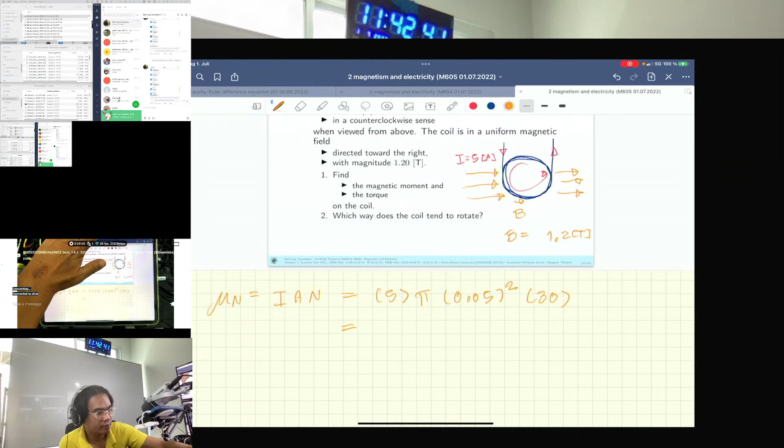5 times pi times 0.05 squared times 30, approximately 1.178. The unit is ampere square meter. Is that correct? Yes, 1.178.

View total. So the next one is the torque. Torque is the product BIAN sine phi. But at this moment, the normal vector of the plane of this circular loop is situated 90 degrees to the vector B, so phi is 90 degrees, so we don't need to worry about it.

So the torque is 1.2 Tesla times 5 times pi times 0.05 squared and 30, and sine of 90 degrees, which is 1, so we don't have to worry about it, just multiply further by 1.2. We get approximately 1.414.

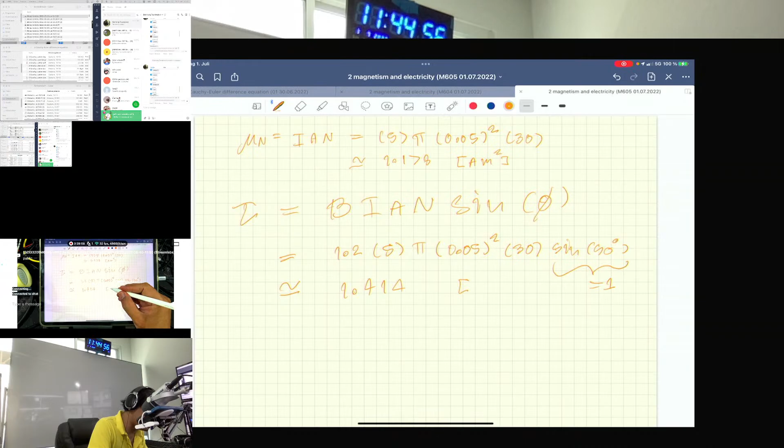The unit of torque is like moment, it's Newton force times distance, Newton meter. And the last question is, what way does the coil tend to rotate? As you know, here is a pushing force, this is the lifting force, in the side view of that coil. This is the coil, this is the pushing force, this is the lifting force.

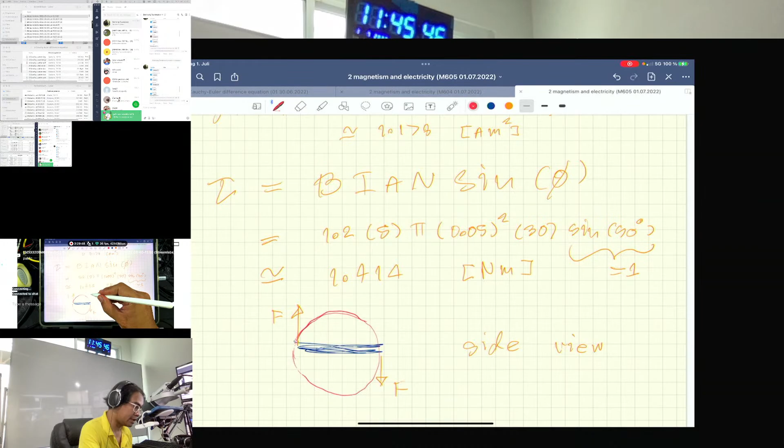So this is the side view. The coil will rotate like this, in a clockwise direction. The left side is moving up, and the right side is moving down. Upward and downward.

All right, and that's it for this problem.